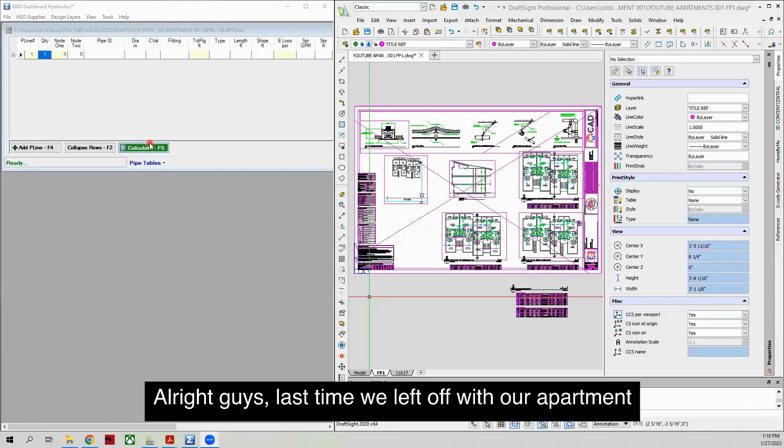All right guys, last time we left off with our apartment layout. We were ready for hydraulic calculations, so that's where we're heading this video. We're using our program, 8800 Dashboard Hydraulics from Sigma. It's a great program, I can't recommend it enough. So let's get started and go into model space.

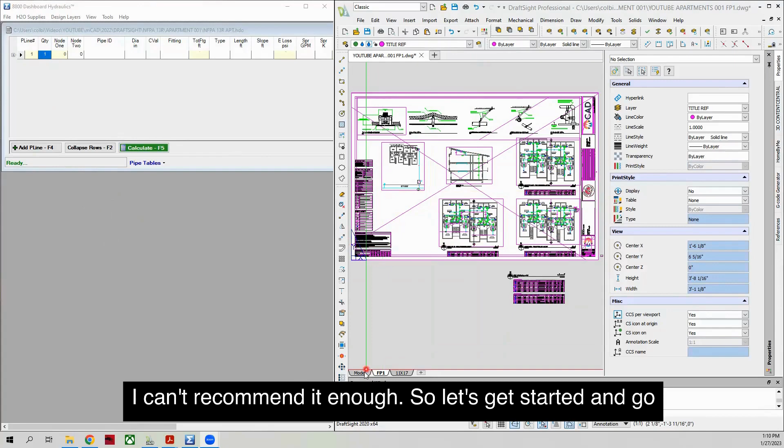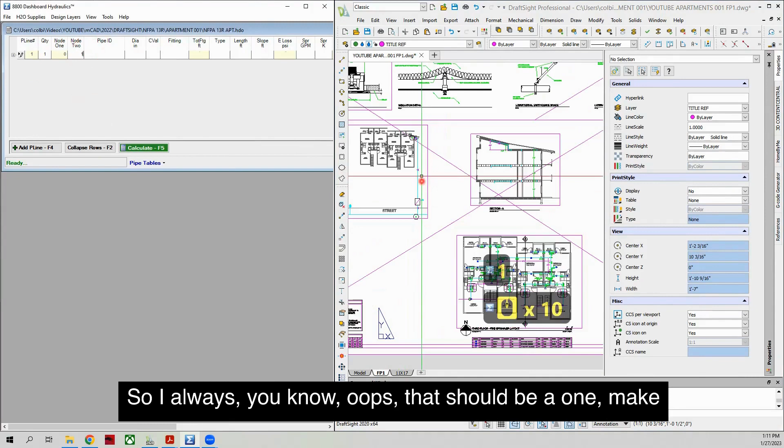I've already got my nodes laid out on here, how I want to calc this. With this program, you have to start at the source with 0 always, and you have to use numbers for the rest of the nodes. So I always make the base riser usually 1, unless there's some other change. If we had a change in pipe size out here, we'd add another node here and then have the base riser be 2.

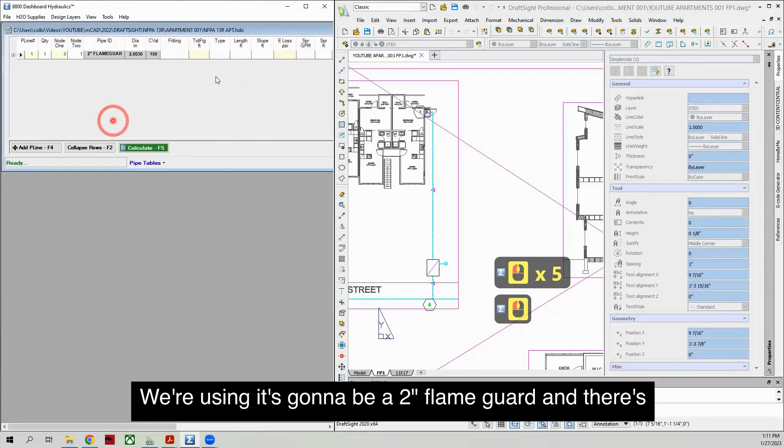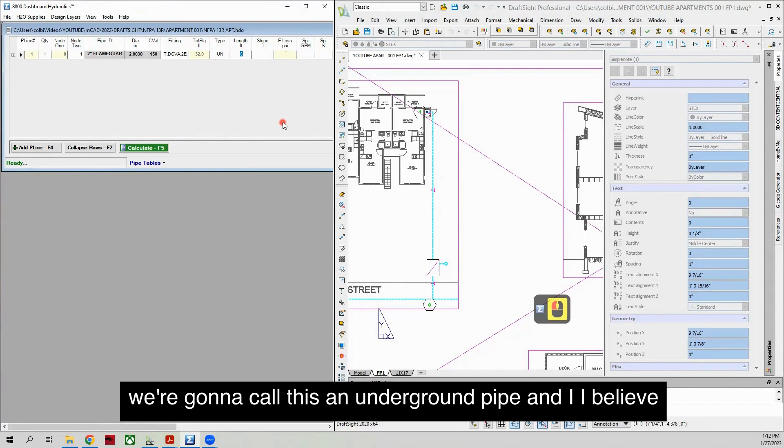So 0 to 1, we're using a 2-inch flame guard, and there's going to be a T, and then a double check valve in the vault, and then we'll have a couple elbows up here. So we'll go 2E, and we're gonna call this an underground pipe. I believe I have this already figured out to save us some time. It's 96 feet. That includes a slope of 3 feet for the 3 foot of bury and then go into the floor.

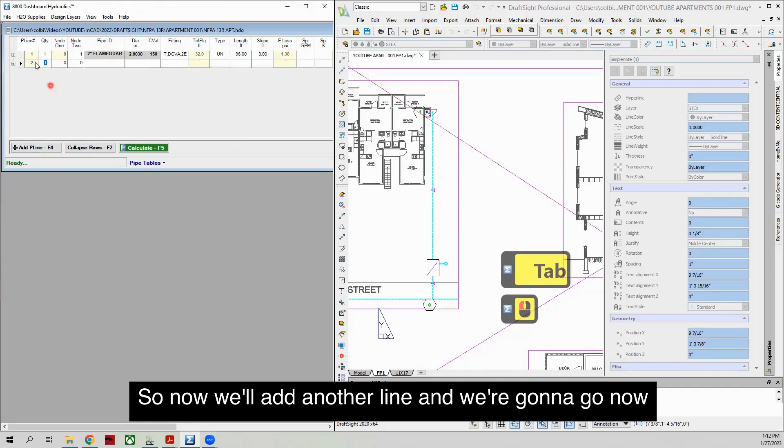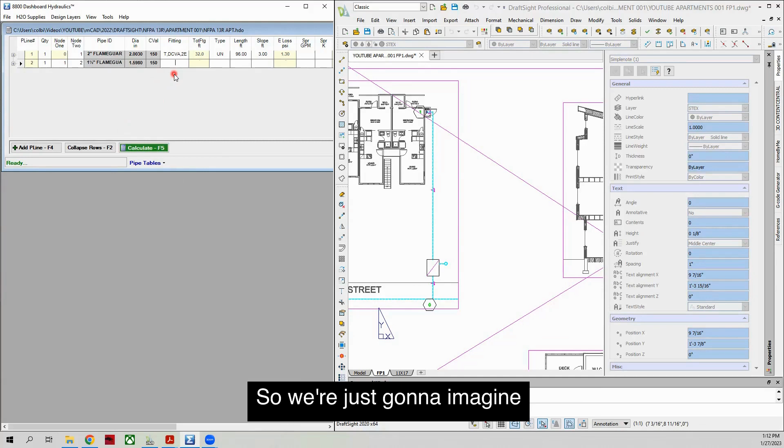So now we'll add another line, and we're going to go from node 1 to 2, which is going to be from our base of riser to our top of our riser. Let's make that 1.5 inch flame guard. This is totally not a real building, so we're just going to imagine a water supply that'll work. We'll probably go through a ball valve at least, and an elbow at the top. And we're going to call this a feed riser.

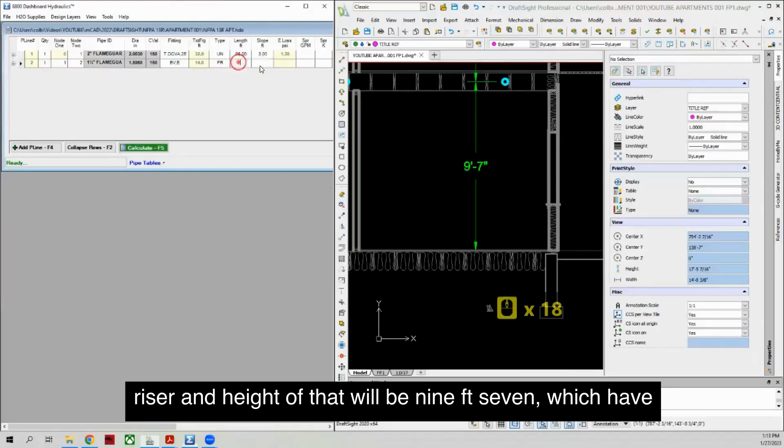And the height of that will be 9'7", which I'm going to have to get my cheat sheet here. All right, so 9'7" is actually 9.58, and our slope is going to be 9.58 as well. We're going straight up.

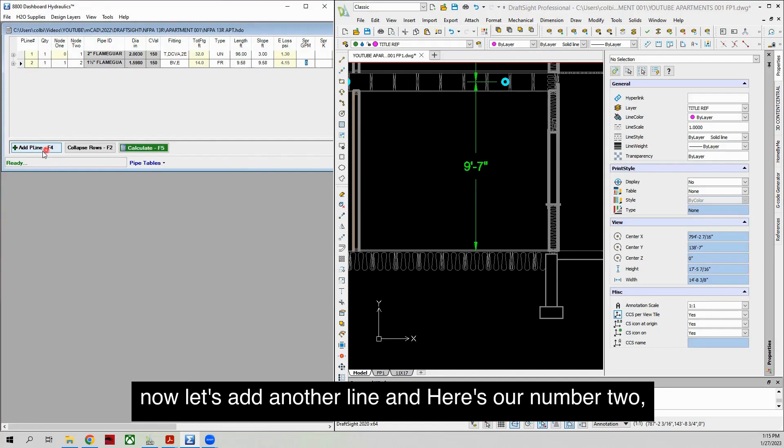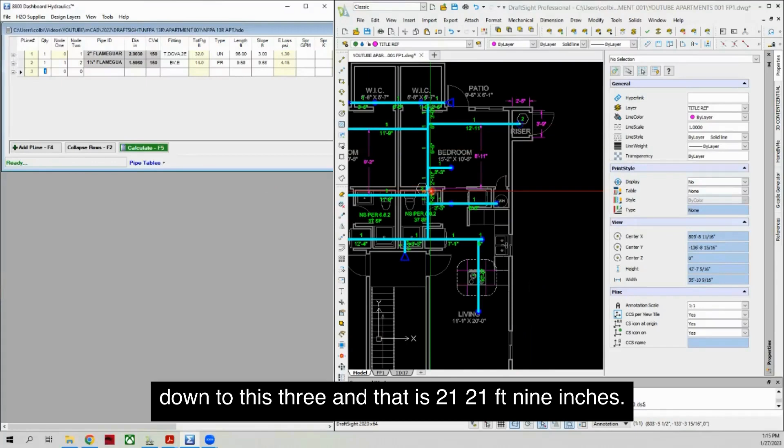And so now let's add another line. Here's our number 2, the top of our riser. And we're coming in across here and down to this 3. And that is 21 foot 9 inches, so that would be 21.75. Oh, let me back up here.

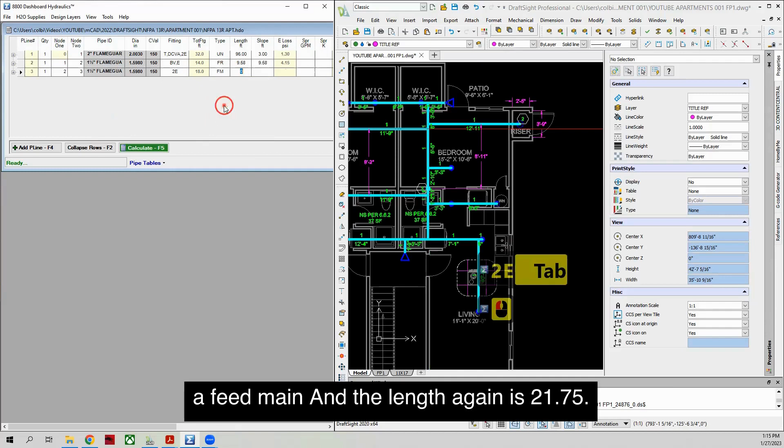We're going 2 to 3. We'll stay with 1.5 FlameGuard. And see, there's 1, 2 elbows. We're calling this a feed main. And the length again is 21.75. No slope. Add a P line.

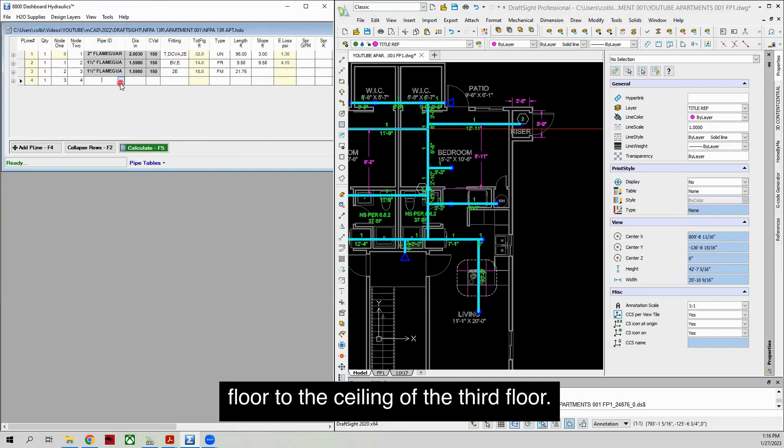That's 3 to 4, which this is going to be our elevation change, going from the ceiling of the first floor to the ceiling of the 3rd floor. We'll keep this 1.5 inches. This is probably our biggest point of pressure loss in the system, this pipe. And it will be going straight up to this 4, and then elbowing off that way.

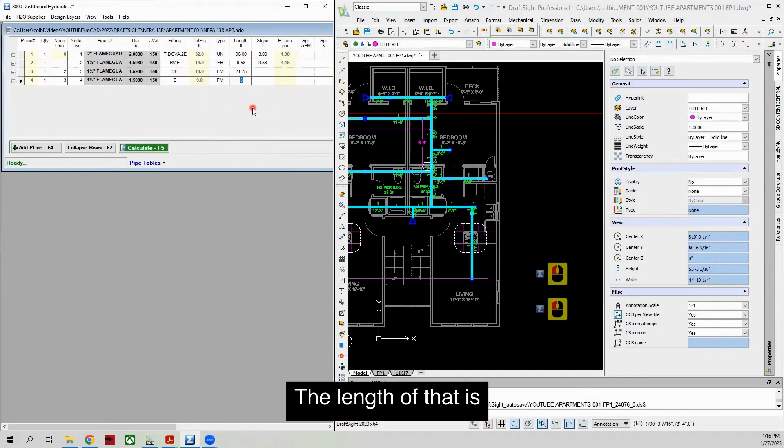So we'll call that an elbow. This is the feed main. The length of that is 18'3", which is 18.25. Slope again is 18.25.

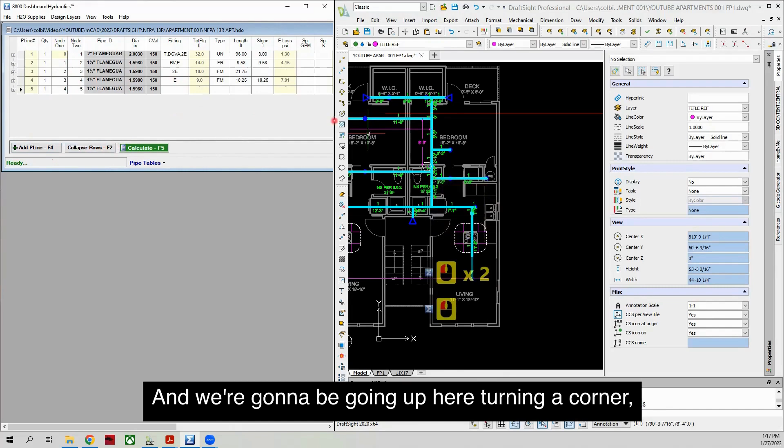So it's going straight up that. Now we'll add another one. We'll go 4 to 5, 1.5 inches. And we're going to be going up here, turning a corner. That's an elbow. Here's another elbow, and then there's this 5. So 1, 2 elbows, and we're calling that feed main.

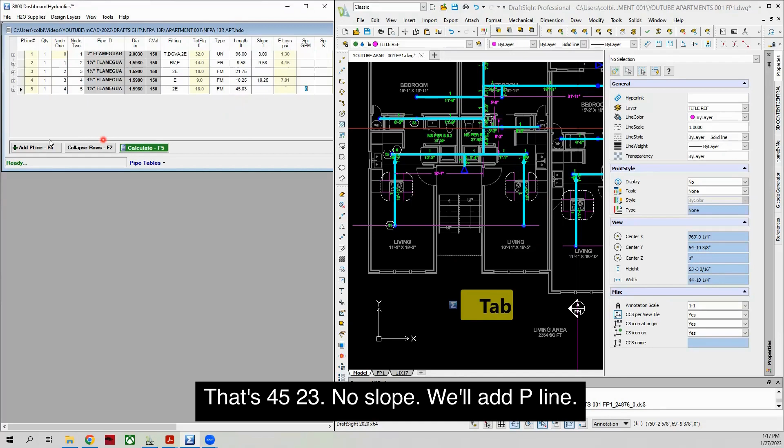And 4 to 5 is 45 feet and 10 inches. So that's 45.83. No slope. We'll add a P line. So now we're going to go from this 5 to this 33, which is a sprinkler.

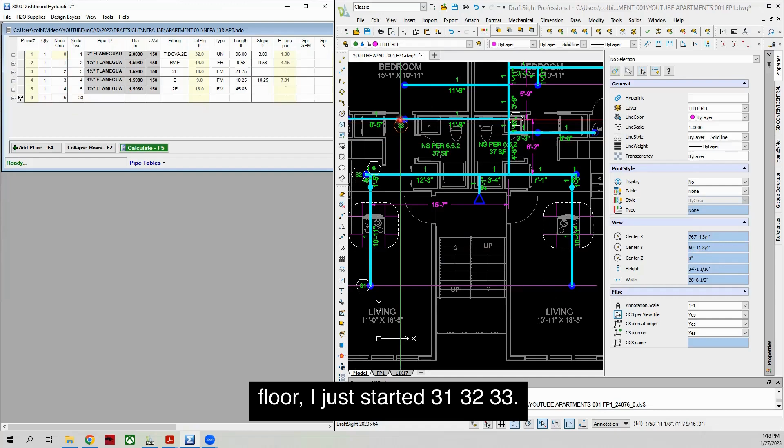So in this program, whenever you have a sprinkler, it always has to be in the node 2 position. 33. Now the reason for that is you have to use numbers in this program, and if it's a sprinkler on the 3rd floor, I just start it 31, 32, 33. There's only 3 sprinklers in this compartment. NFPA 13R allows us to calc only the 3. If it was a 13 system, we'd have to go for a 4th, regardless of if it was in the same compartment.

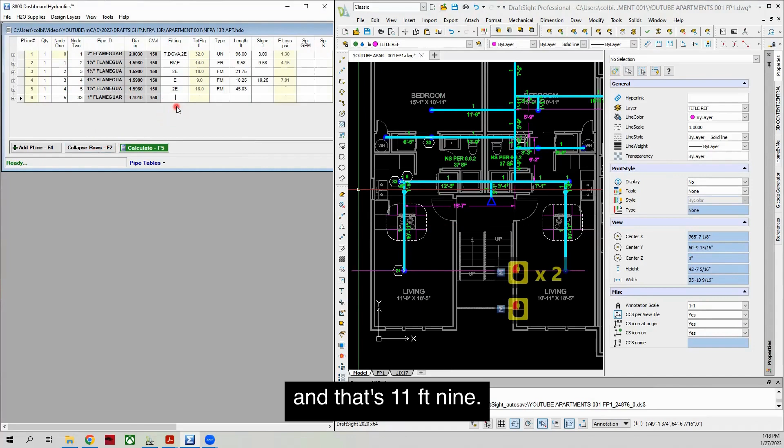This can be 1 inch, and that's 11'9". So we're going to put a T and an E. So T, comma, E, and we're going to call that a branch line. And it is 11'9", which is 11.75. No slope.

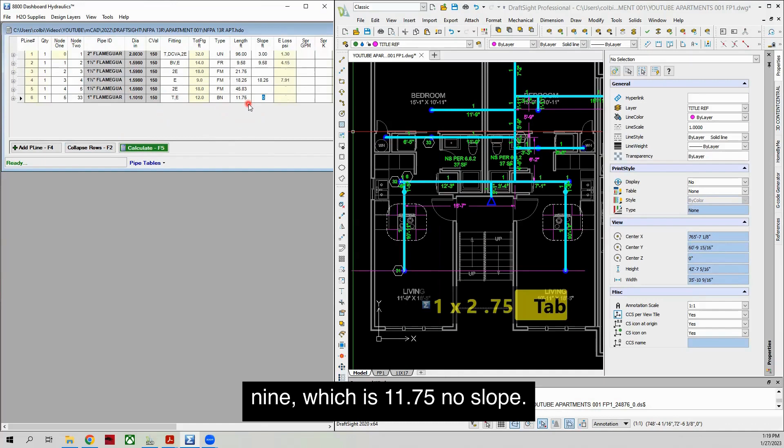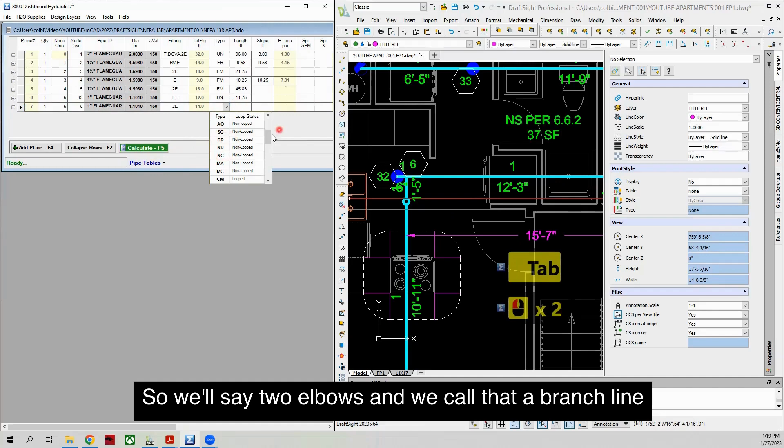Okay, now we're going to go from 5 to 6. Again, 1 inch FlameGuard. And it's like we got 1 elbow. We'll call this another elbow here. So we'll say 2 elbows. And call that a branch line. And let's see, 5 to 6, that was 21.10, which is 21.83. No slope, no elevation change.

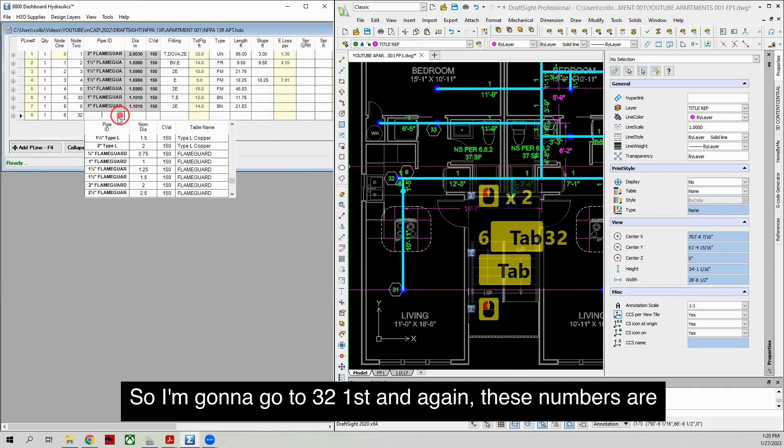Okay, so now we're at 6. We can go to 32 and to 31. So I'm gonna go to 32 first. Again, these numbers are just kind of arbitrary. I just placed these in here when I was, could have been 31 here and 32 and 33. It doesn't matter. Could have gone 7, 8, 9 as well. It really doesn't matter. The only number that it forces you into is 0 has to be your source.

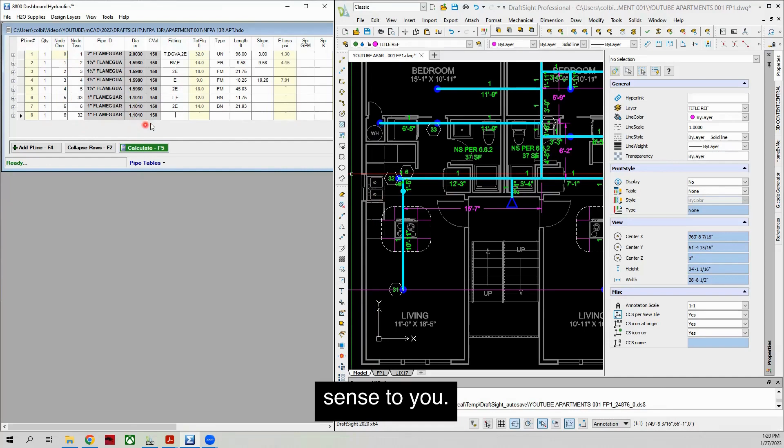So it's just doing some sort of system that makes sense to you. Let's see, we're going 6 to 32. I'd say we have an elbow. I'm going to add another one here just to be conservative, make sure we got enough. Branch line, that is 6 inches or 0.5 feet.

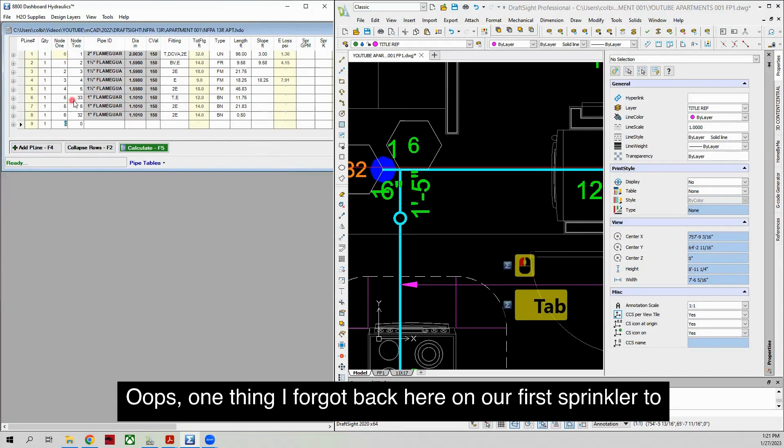No elevation change. Oops, one thing I forgot back here on our first sprinkler - to make this a sprinkler, we're using Senju 4.9s, and we have a 16 gallon a minute requirement. And this one's a sprinkler as well, so 16, 4.9. Okay, now we're going 6 to 33.

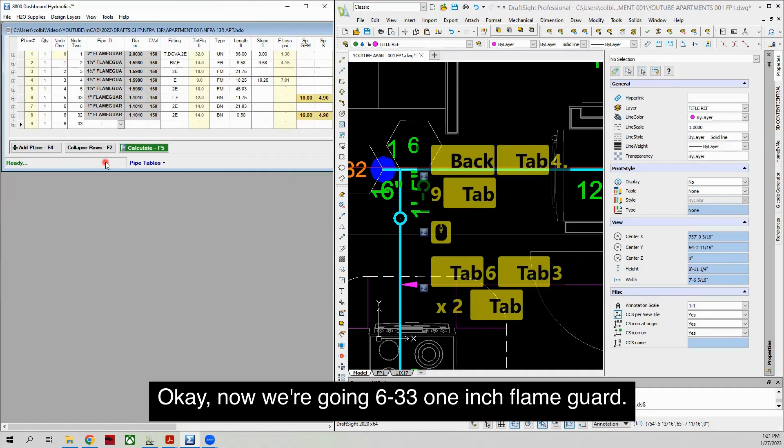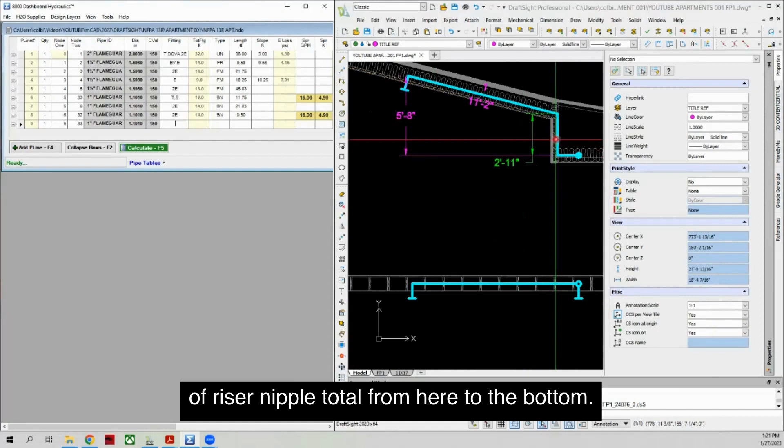1 inch flame guard, and this is going to be a little bit complicated. We have this little riser nipple right here that we haven't labeled yet. So there's 2'11" of riser nipple, but total from here to the bottom we have a total elevation change in this pipe of 5'8".

So that will be my slope. I'm going to go ahead and put that in, 5.8, which is 5.67. Okay, so we've got 1, 2, 3 elbows.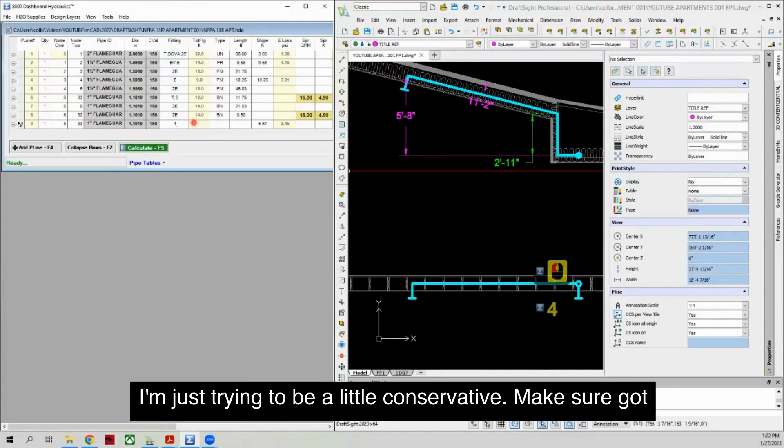I'm going to add another one for right here, even though we've already counted it twice, just trying to be a little conservative, make sure we got everything. Branch line - the total for this one, I added it up earlier, is 15'3", which is 15.25. Okay, now we again need a 16 gallons a minute and 4.9.

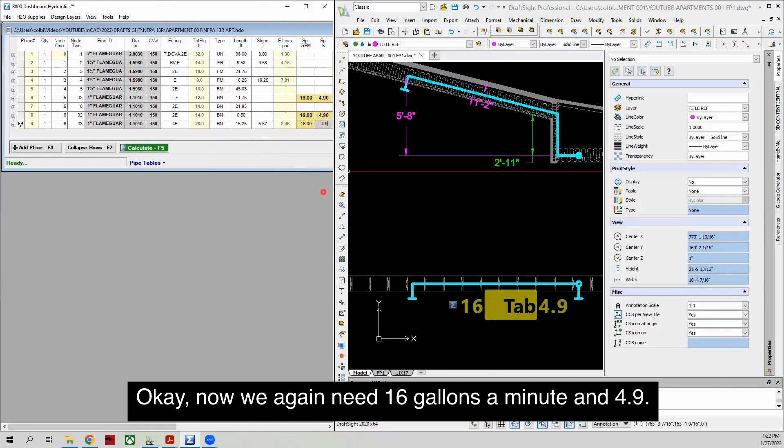So we are done inputting this, so I'm going to go ahead and save.

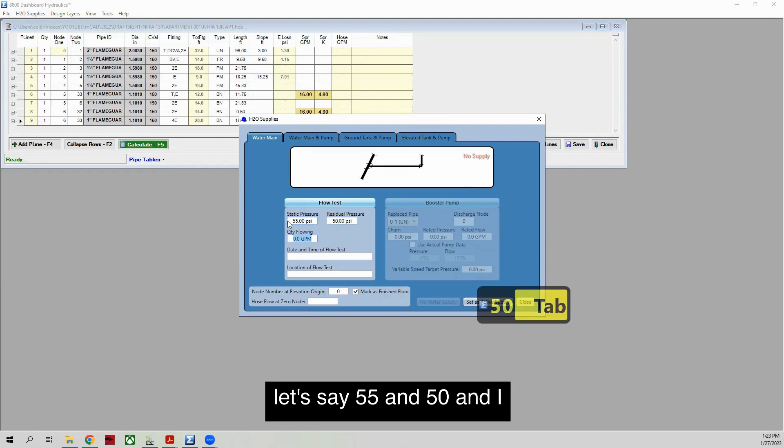Let's go to our water supply, and I'm just going to throw in an imaginary thing. Let's say 55 and 50, and I don't know, 900 gallons a minute maybe. This is the floor, I want it to be node 1, mark as the finished floor. Okay, set as active supply.

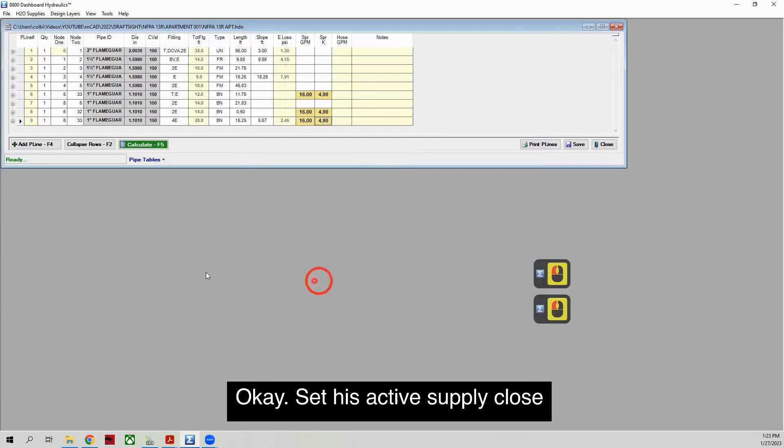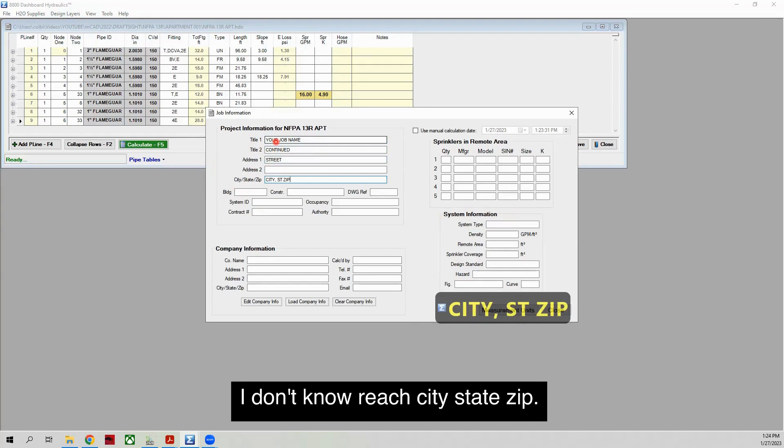Close that. Let's go to job information. Let's see, your job name would be here. Continued, I don't know, street, city, state, zip. Oops, wrong one, there we go. Let's see, I don't know what this is, type 5 construction, put that in. Authority, whatever your jurisdiction you're working with.

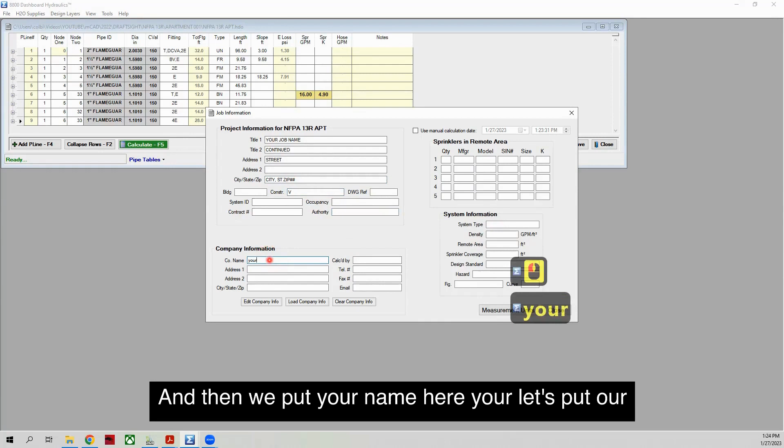And then we put your name here. Let's put our caps lock, your name here, your address. City, state, zip again. We can put your info in here.

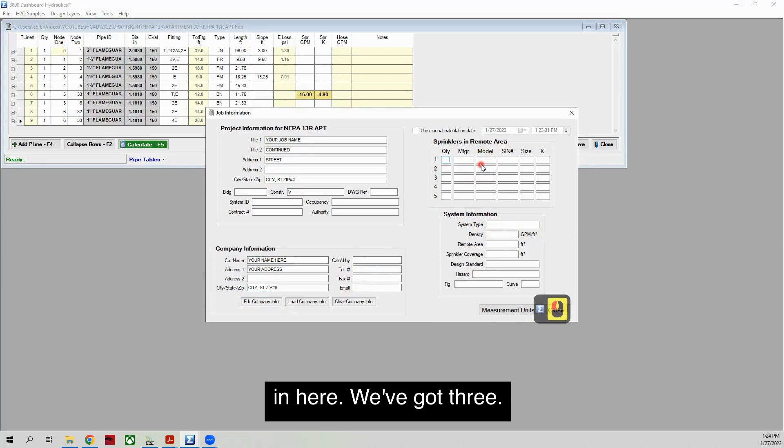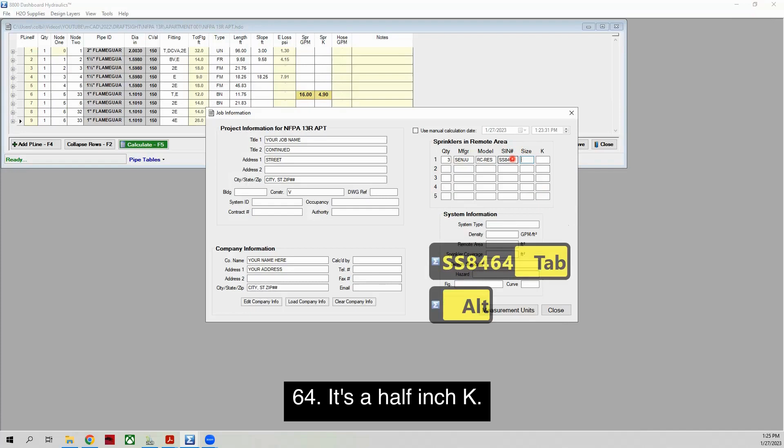We've got 3 Senju RC-res. Let's see, the number on those is SS8464. It's a 1/2 inch, K factor is 4.9. System type is wet - that's a little inconvenient getting covered over. Let's move that. 0.05 density.

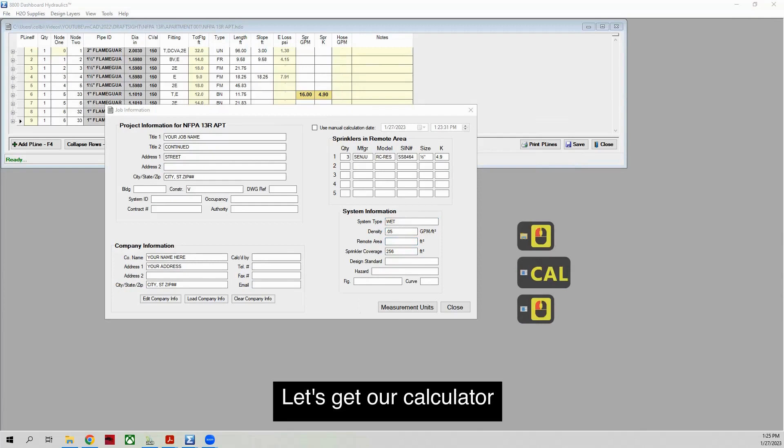Remote area - see, it's going to be 256 times 3. Should know that off the top of my head. Let's get our calculator. 256 times 3 equals 768.

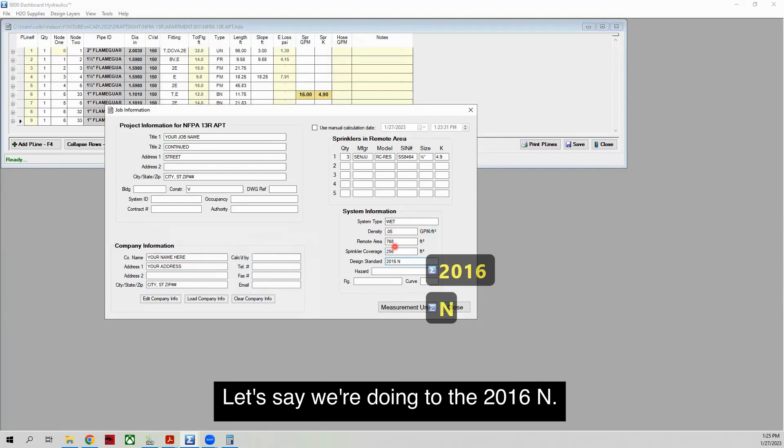Design standard - let's say we're doing to the 2016 NFPA 13R. Hazard residential - this is really 13 information they're looking for. Design curves - so that doesn't really apply to a 13R system.

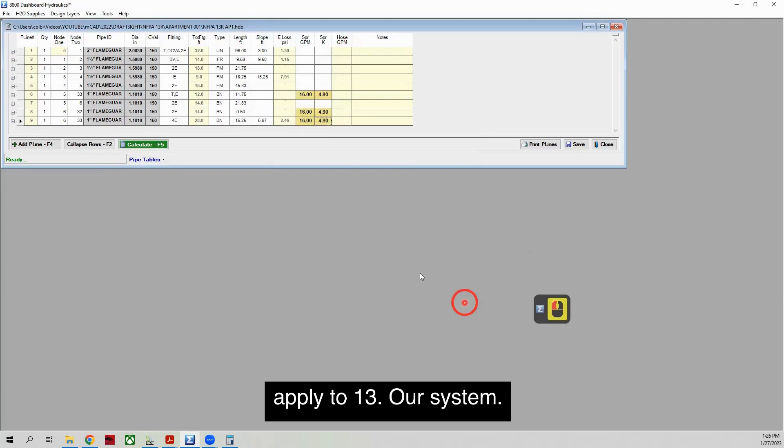Okay, let's go into calculate. Oops, did something wrong. Okay, do you wish to continue? No, let's fix it - that was supposed to be 31. Okay, let's save and calculate.

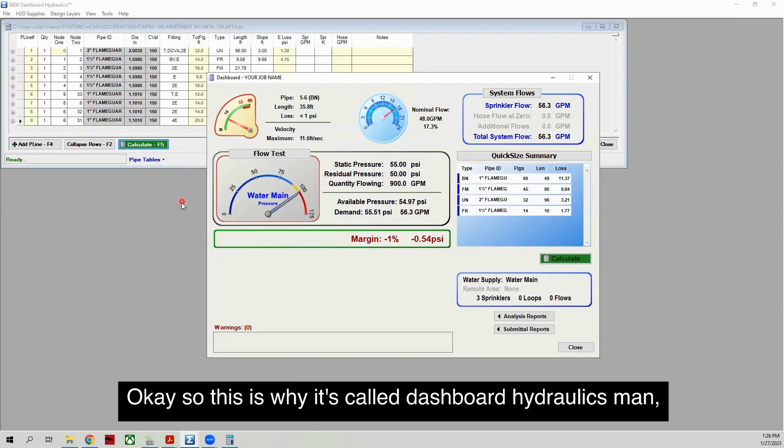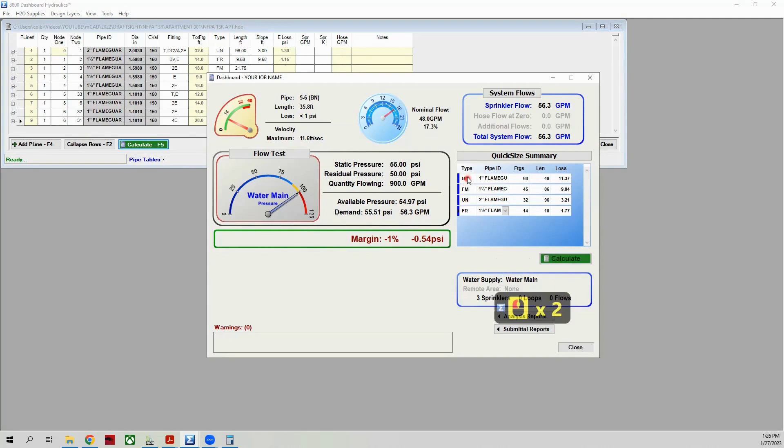Okay, so this is why it's called dashboard hydraulics. Man, we are just not quite working. Of course this is imaginary, so we could even increase our pressure if we wanted, but let's just try. This is what's kind of nice about this program - we labeled these pipe types.

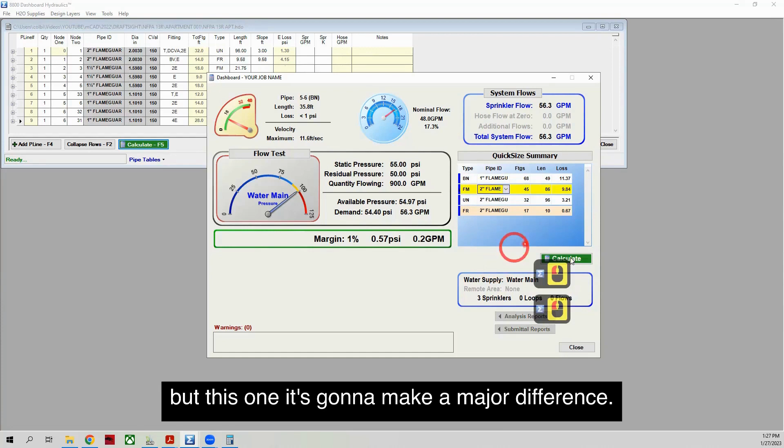Now it's showing me what the different pressure losses are. I'm not really going to gain much actually if I increase this - like if I put that at 2 inch, I hit calculate, it hardly changed anything. But this one is going to make a major difference. Well, and so there it works - we go 2 inch to the roof and then just everything in a 2 inch main down the middle, and everything coming off with 1 inch.

So we got our 10% margin, we're at 12.5%. It's pretty easy to see right here. So we're good to go.

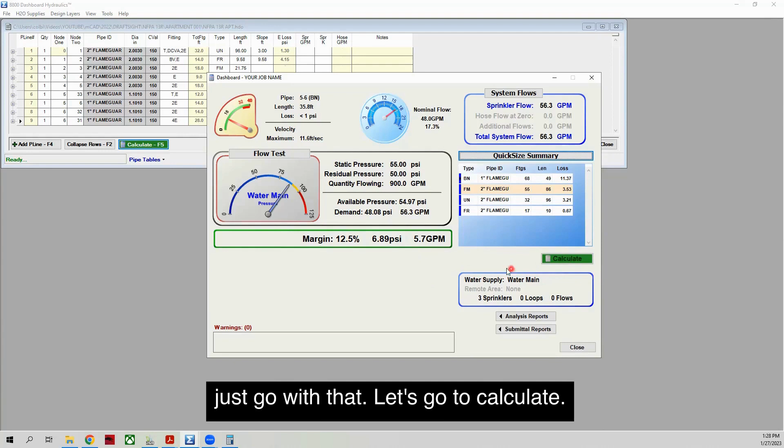Let's go ahead, I think for our demonstration, let's see how do I want to do this. No, that's fine I guess, let's just go with that. Let's go to calculate - oops, I already did that, sorry, that's not what I want. It's already calculated. So go to submittal, and we'll see what our submittal looks like that it made for us.

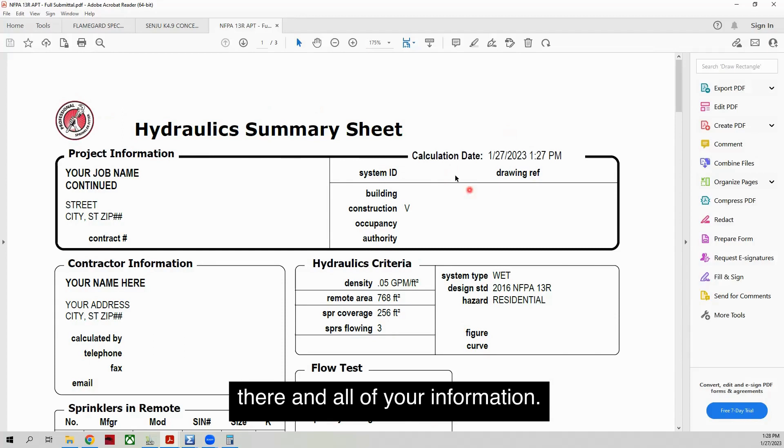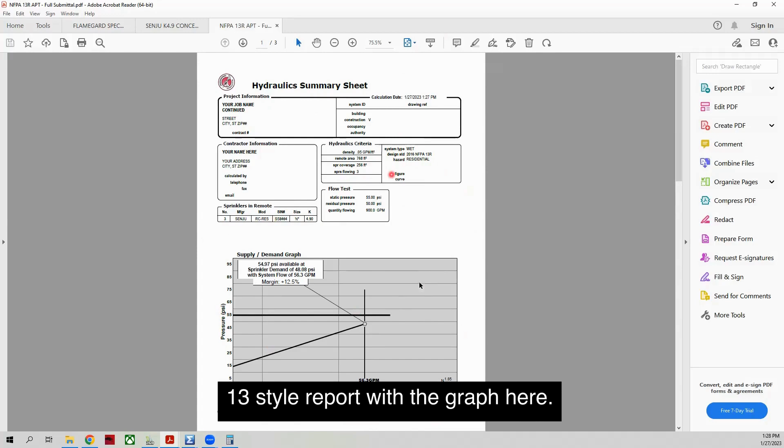So here we've got - this is a random logo I put in here for demonstration purposes, but your logo could be there and all of your information. Let's go to full screen here. So here's our report - this is standard NFPA 13 style report with a graph here, 13 style graph.

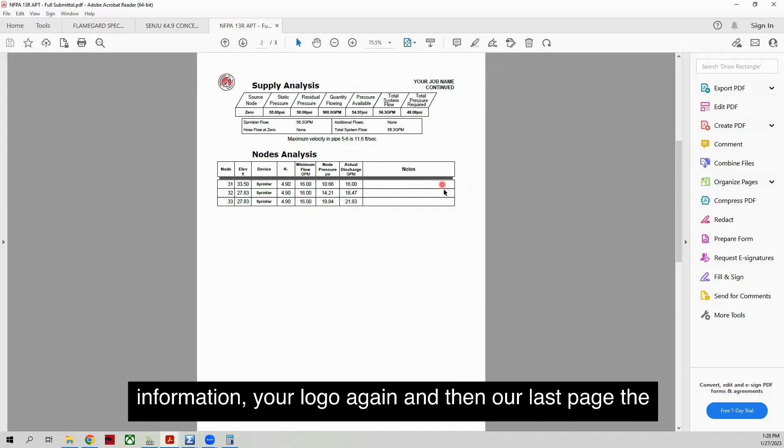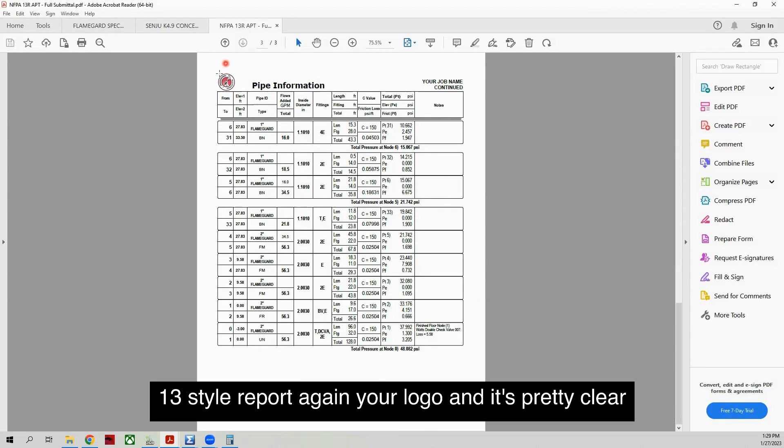We've got our nodes listed, our water supply information, your logo again, and then our last page, the full report on the calculations - this is an NFPA 13 style report. Again your logo, and it's pretty clear, everything exactly the way NFPA 13 requires for calculations. And of course this is 13R, but we're doing calculations per 13.

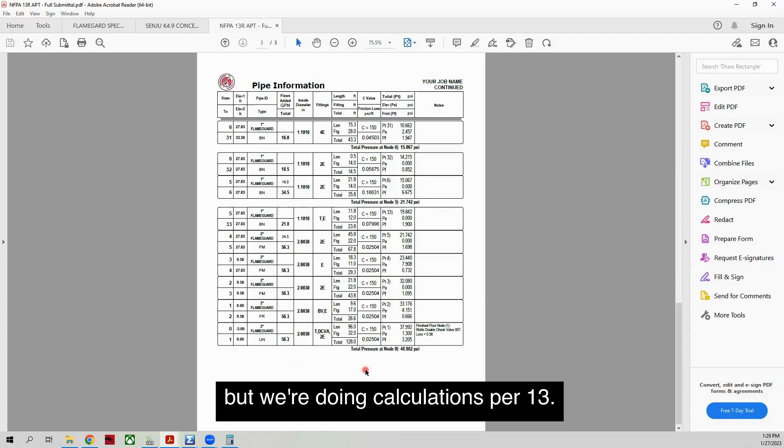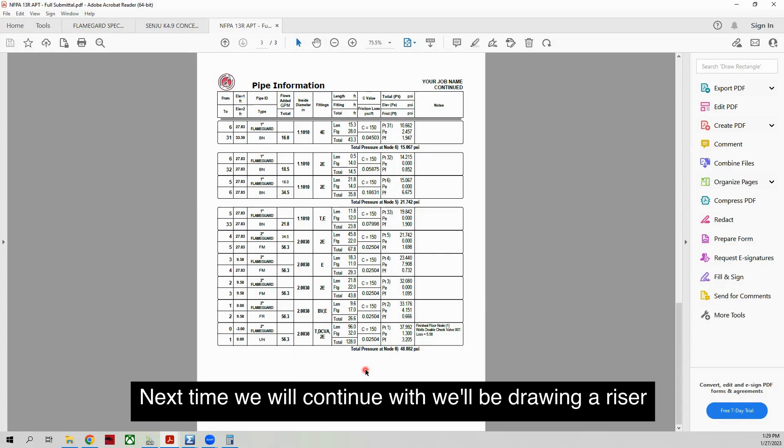So that's basically it for this video. Next time we will continue with, we'll be drawing a riser detail in 3D in SketchUp.

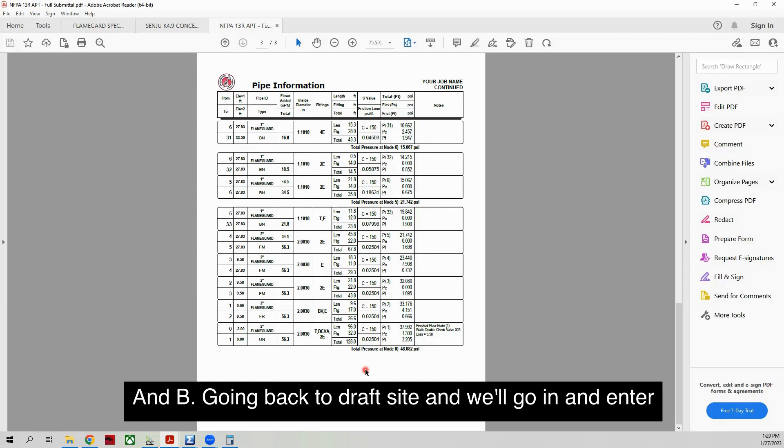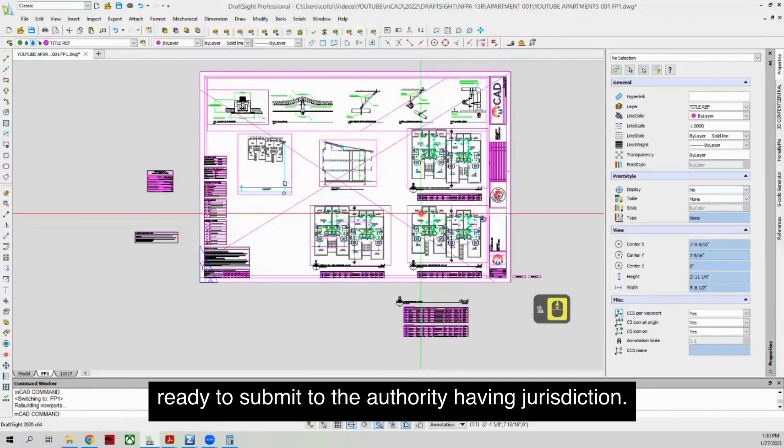And we will then, for our final video, we will export that as a DWG and go back to DraftSight, and we'll go in and enter all of our hydraulic calculation information onto the drawing along with our riser detail, which we'll put right here and label it all. We'll go through our checklist and just make sure we're ready to submit to the authority having jurisdiction.